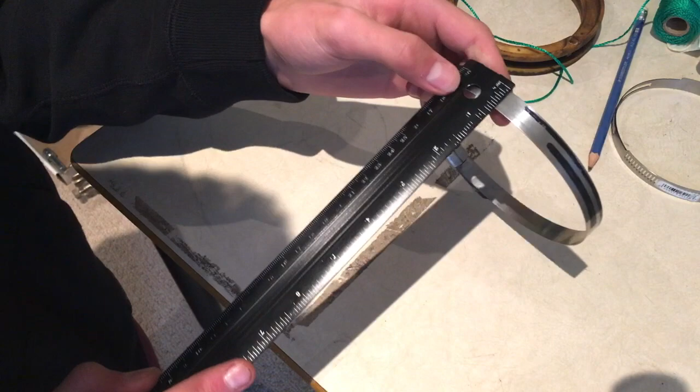Alright, we're working with a half-inch stainless steel hose clamp here to make the hook plate.

And I actually have the cutout for the hook plate drawn out already. But just what you need to know when you're buying it, try to get one that is at least 5.5 inches in diameter, because it has to be able to fit around the hook. It has to be able to fit around this plastic piece.

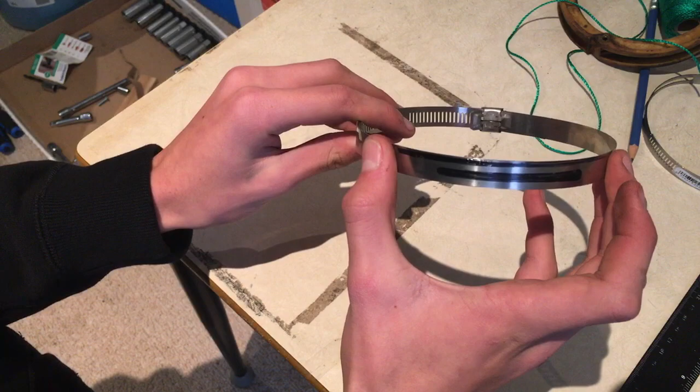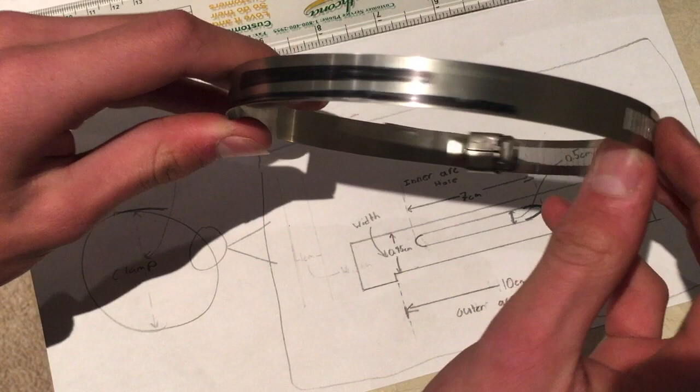But alright, so here I've drawn it out onto the hose clamp, and basically what I'm showing in this diagram is here's the hole. The hole's 0.5 centimeters wide, and in my hose clamp, when I bought it, it was about a 1/2 inch hose clamp, and we need to taper that down to about 0.95 centimeters in the part we're going to be using.

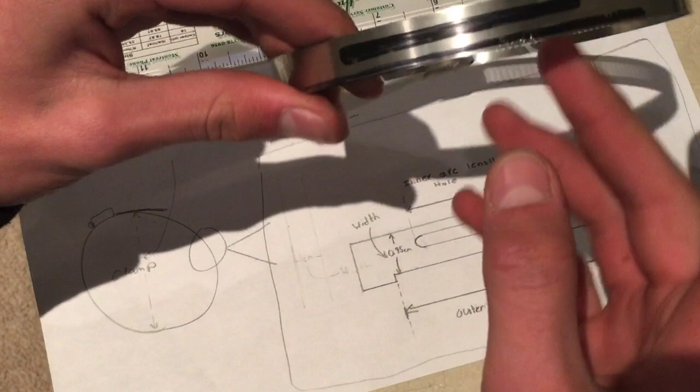So what I'm going to do is use a Dremel to take off this edge right here, and then we'll be centered. I'm going to make sure this is pretty centered too, to the best of my ability.

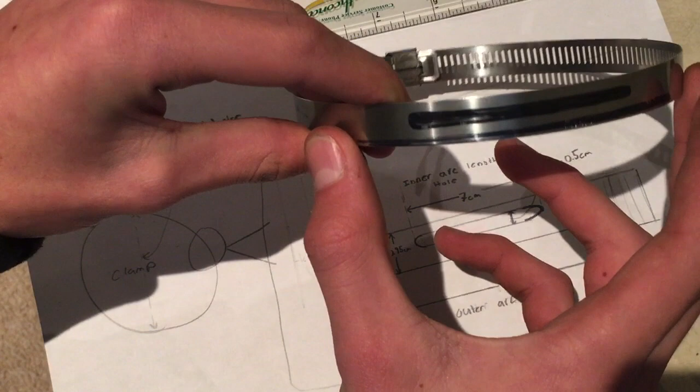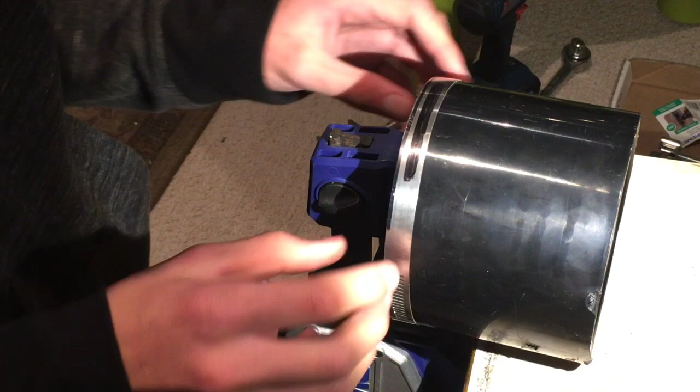Alright, now that I got the Sharpie all drawn on there with the dimensions, I'm going to use the Dremel and cut away.

Something I learned from doing this twice now is that it's important when you put your hose clamp on the PVC, you want to get it to the edge, because you don't want to burn away and melt the PVC pipe. You're better off just to do this, because burning makes a really bad smell.

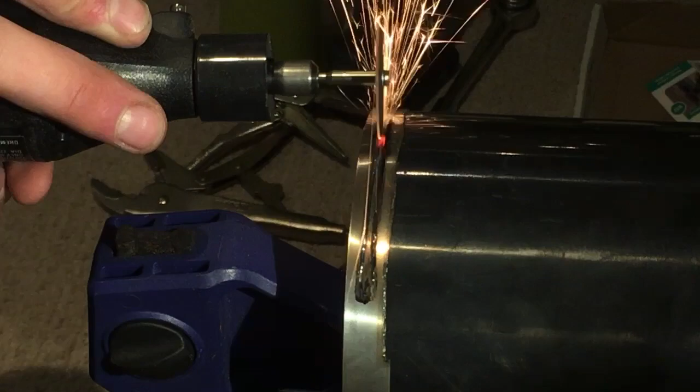Alright, I just finished doing a bit of cutting. I'll show you guys the progress.

I don't know if you can see that, but I got this inner part - oh, it's hot still. I got this inner slot on either side, and I took off the edge here. And now I think I'm going to go with a file and try to get that off as carefully as I can.

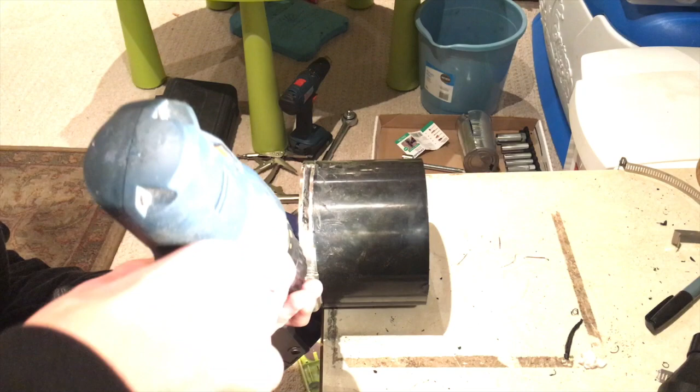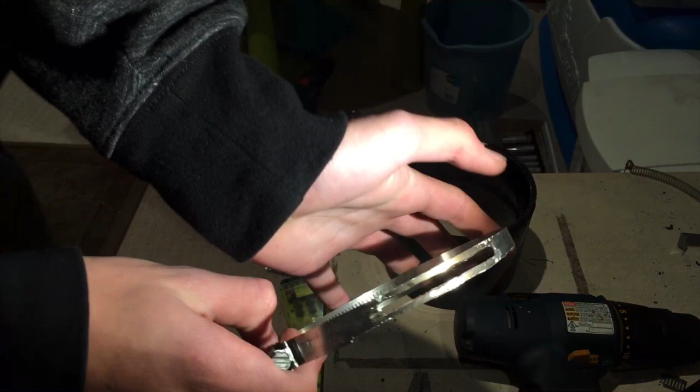Alright, let me get this thing off. Let's melt it on. Pretty good.

Alright, now it's time to do some of the more detailed work. And for that, I'm going to switch out this blade to something with a sanding file on it.

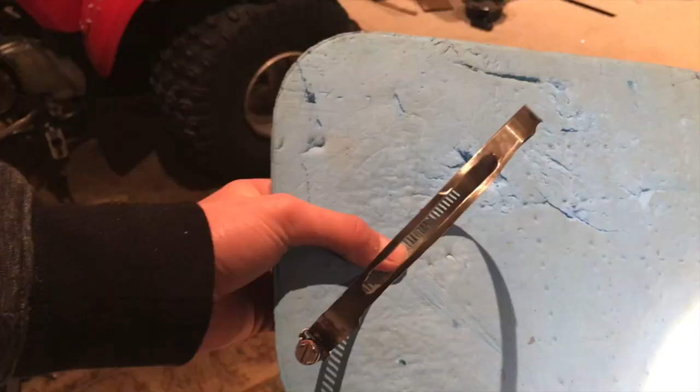Alright, I did the best I could with the sanding and the polishing to try to make it nice and smooth, which it is now. No burrs on it, it slides through there pretty nice. Everything's the right width and stuff.

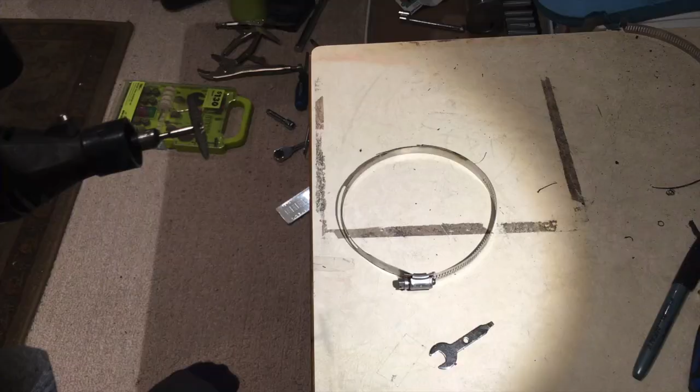And now it's just time to cut, and then I'll show you how to bend it. Alright, when I go to cut this now, it's important to make sure that you try to give yourself as much room as you can, because it'll make bending it easier. So I'm gonna cut at about here.

Alright, now that I finished cutting the recoil decompression hook plate, I'm gonna go on eBay - they've given us great pictures on how to bend it.

So using these photos, I'm going to... this gimbal's slow, sorry. I'm gonna take that and turn it into this.

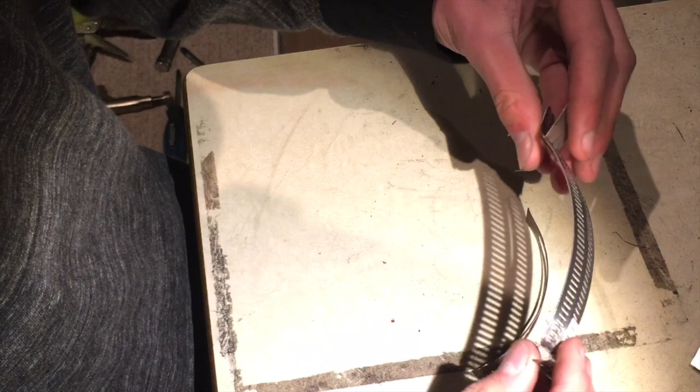I recommend buying a couple extra of these clamps, and when you make them, you can cut them up. You don't need to do the whole process. You can just take it like this, bend it, and practice a couple times until you get the hang of it.

So here's the one I've done, here's a couple of the practice ones, and now I'm going to do the real one. I've been using these pliers, and they're pretty good. I guess a vise would be okay, I've tried a vise once and it didn't work well for me, so I'm going to stick with this.

Alright, the first bend I make is the more complicated one, it's this one right here, because if you mess this one up, you can turn it easily into this one, but if you mess this one up, you can't turn it into this one. So I recommend you start with the complicated one. I'll put a picture up on the screen if it's not already up.

So you're going to clamp it, and this one's not a very long bend, it's kind of short. Okay, let me actually take a little bit more off this. Where's my glasses? There they are.

Sorry. Hot. Okay, I touch it every time. Ow, damn, that hurt. Alright.

So now what you're going to do is take this end. We're going to do the more complicated bend first. You want to get it a couple of, maybe about a centimeter or two into the pliers. The first one you make isn't a very big one. And you're going to bend it with the curve, not against the curve, with the curve. You're going to go down. Ooh, it's actually harder.

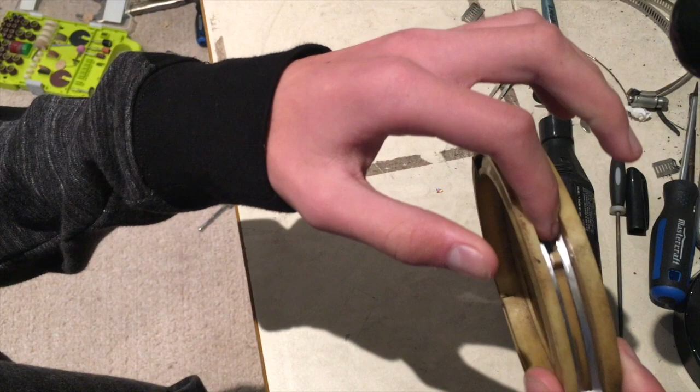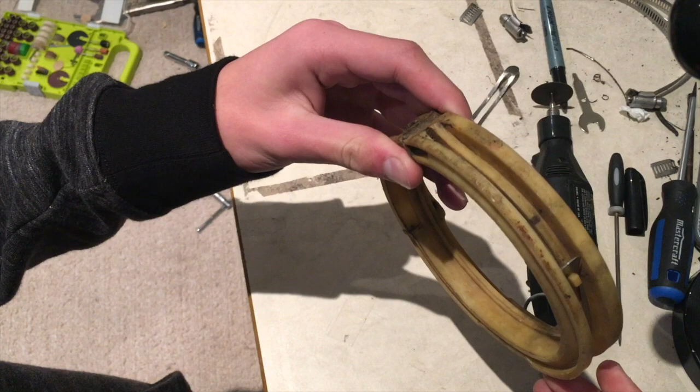You can see it rides up, and then it falls back down, just like it's supposed to. Comes up, then it slides down. And it fits in there really good.

Yeah, and you can make your own. It's real cheap and doesn't take too much time, and it's worth it, 'cause it'll save you a bunch of money.

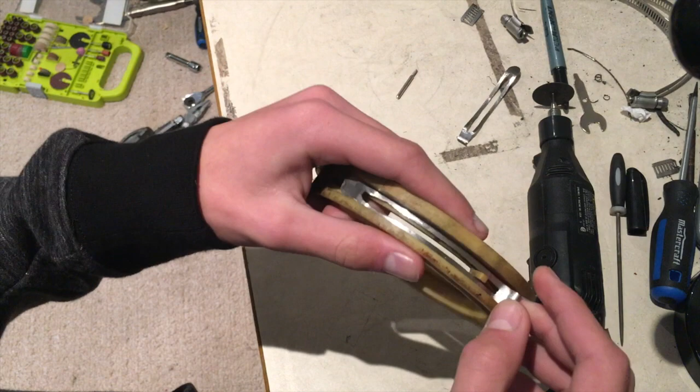Alright guys, this was my first video, so I apologize if there were any editing or filming errors, I'm sure it's going to be a bit rough to watch, sorry about that. I hope some people found this video helpful. I know that these decompression parts are hard to find and they're also expensive to buy on eBay, so that's kind of the reason why I made the video.